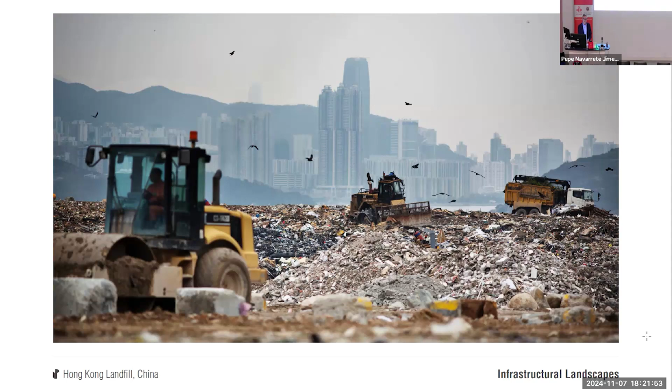It was inevitable, being here in Scotland, to start by quoting a fundamental character in this story that we're going to go through together today, Ian McHarg. Unfortunately, he was right. Humankind has always had the need to dominate the world, obviously in the wrong way. And one of its worst signs is the formation of immense landfills that accumulate millions of tons of waste uncontrolled. This will be the common thread of this lecture.

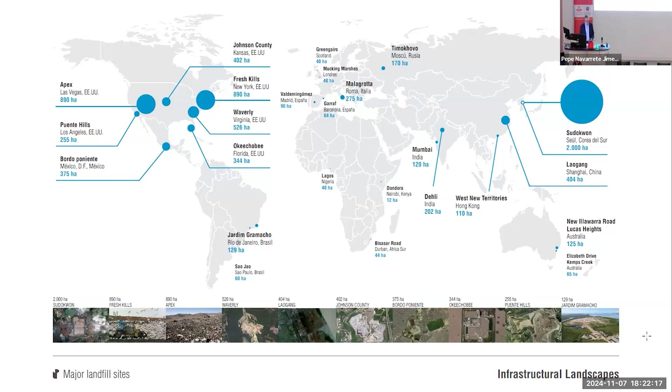As you can see, it is a problem that affects all of us everywhere, including here in Scotland. It is a global problem that affects us locally. Waste and its consequences are no longer invisible. Nothing that we understand by waste disappears from nature on its own. The Italian environmental historian Marco Armiero has defined it perfectly. We have entered the age of waste, the Wasteocene, as a specific alternative to the narrative of the Anthropocene. The metabolism of the city and its externalities are at the center of contemporary public debate.

Even more effective than reducing, recycling, reusing, or recovering is to avoid generating waste. So where does our waste go? Rather than to waste treatment facilities of any kind we can imagine, the rubbish goes into nature, just like that. All the images we have seen previously were natural places. This causes serious environmental damage, which, due to ignorance at first, has caused the problem to reach a colossal dimension that is difficult to reverse, like the entropy that the American artist Robert Smithson spoke of.

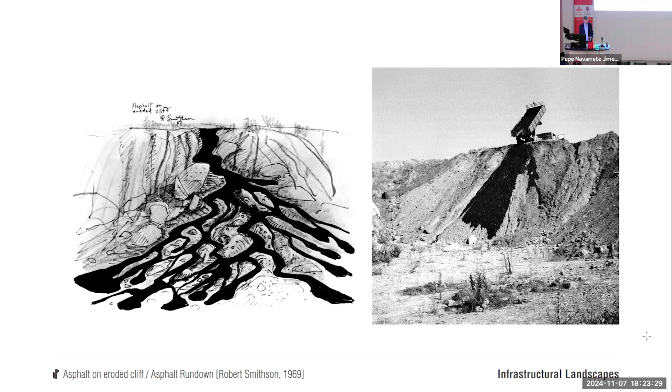Systems are becoming increasingly entropic, more chaotic, releasing more energy and transforming themselves. Human behavior, lack of environmental awareness, and insufficient waste collection and treatment infrastructures exacerbate the problem in all areas, regardless of density and use. The reality is that we don't know what to do with our waste. If we don't know what to do, why do we keep producing it? We think we know, but in fact, we are not able to assimilate the production.

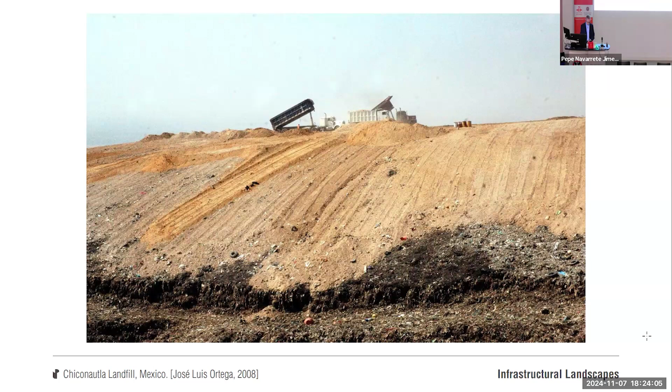Neither is nature. In this regard, 15 years ago, I wrote that the problem of municipal solid waste generated in our cities is not solved. It is simply displaced. This is still the case today. And if we are aware of it, then we should ask ourselves, why do we still produce waste? We depend more on education and awareness rather than on technology. Politics, will, education: if we are all concerned, what is our task in this project of eco-social transformation? Whether we want to or not, it is inevitable. What is our relationship to landscape?

We could say that until the 18th century, the notion of landscape was a garden designed in an enclosure. There are magnificent examples, especially the Arab gardens, such as those in La Alhambra, in Granada, Spain. The notion of landscape changed when the English gardeners in the 18th century decided to jump over the enclosure and understand that all of nature is a landscape. In a continuum, in these gardens, Uvedale Price, Payne Knight, Capability Brown, William Gilpin, we find the origin of the concept of continuous landscape that fuses the natural and the artificial, the picturesque.

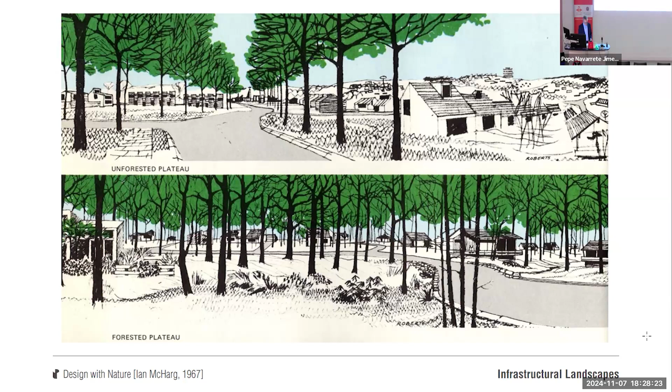We are interested in Ian McHarg's Design with Nature, firstly because of his vision based on new awareness and relationship between nature and the environment produced by human beings, and secondly, because of his approach to landscape based on a multidisciplinary condition, using an overlapping system to reveal the condition of a landscape, from beauty to utility, including vegetation, geography, hydrology, productivity, and energy. All of this is based on respect for the environment.

Design with nature is nothing more than giving continuity to what already exists in accordance with its characteristics or condition, so that the natural and the artificial can coexist simultaneously. Ecology is the basis of a new method which describes natural processes and transformation factors, a new hybrid between the natural and the artificial.

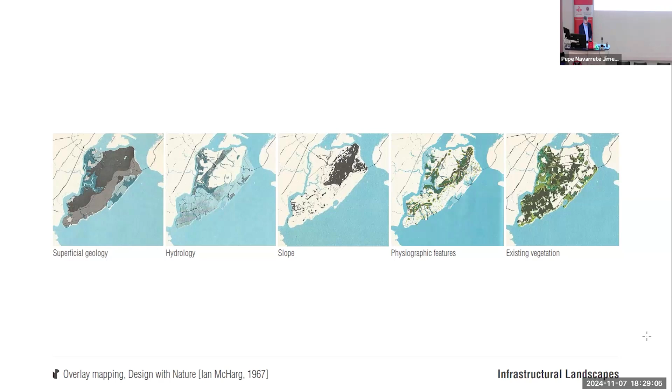Also, as I mentioned, in 1967, Robert Smithson published A Tour of the Monuments of Passaic, where he proposes a look at the destructive places of modern industry, condemned to be invisible, on the understanding that these places should acquire a visibility equivalent to the picturesque proposals about wild places, or what is the same, about nature. This action, moreover, takes place mainly on the ground level. Traces of human action on the territory, or topographies.

He reinterpreted Olmsted's work and promoted the construction of artificial topographies on wastelands as a basic operation of human beings in their relationship with the environment in which the passage of time was recorded. Smithson was interested in places where it was possible to ask new questions and pose new answers. He called them non-sites, defining a new conception of the world through two fundamental concepts, entropy and recycling, where natural processes are integrated in continuity with physical and energetic ones.

And this continuity arises from the manipulation of the ground through the construction of artificial topographies, while at the same time allowing the appearance of new surfaces for new, as yet unknown uses. Therefore, topography as a contemporary conscious fact in our relationship with nature is the second condition of the contemporary landscape that is interesting to us.

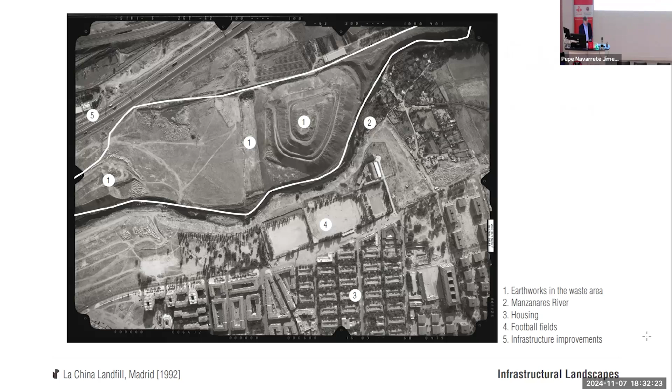We could affirm then that infrastructural systems, understood at the scale of the territory, are themselves generators of landscape. Today, these systems include the processes of recycling waste that in reality is not actually recycled, it's hidden. We need a critical look. A critical look should make us reflect on our relationship with waste and with the planet through the environment and nature. It is clear so far that we live in a system based on a fusion of the natural and the artificial.

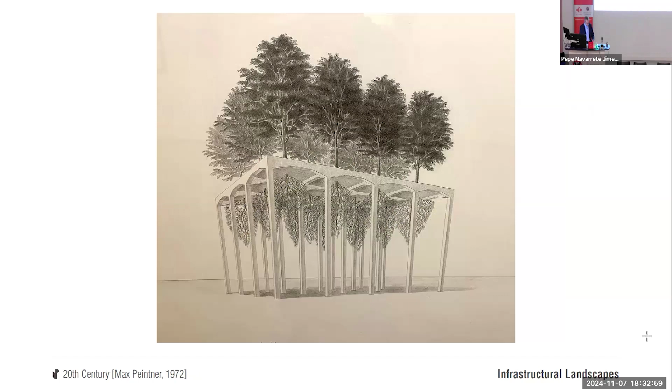We have gone from occupying the territory to exploiting it and annihilating it, to trying to hide this fact. The paradigm of ecology, which fuses the natural and the artificial, transforms our vision of the world at the beginning of the 21st century. In fact, it has been transforming it since the end of the 20th century. But we still only understand it in small, scattered fragments, awaiting a truly revolutionary process that will bring about a real change in our relationship with the planet. Apparently, we do not have the answer, although small changes in that direction are beginning to be identified.

So what can architects and landscape architects do when facing this phenomenon of waste? Research and dissemination of results will also help us. I have been doing it for the last 20 years. I wrote this in the conclusions of my doctoral thesis 10 years ago: waste should not be seen as a problem, but as an opportunity. This is our new task. For the time being, this is perhaps the best approach that we can be taking in our struggle to manage the growing mountains of waste.

Well, I was wrong. More can be done through the visibility of these projects, raising awareness to generate less waste and improve our relationship with the environment. We can help by projecting the change and making the invisible visible, using architecture and landscape architecture as a vehicle, as a tool. At the same time, repairing the damage caused to nature, but not returning it to its former state. This is not possible.

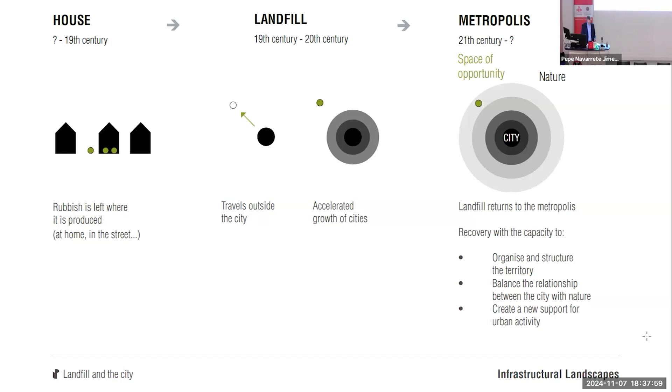So what can we architects do in this context? First, give visibility to the processes of recovery from the damage that has been caused in order to prevent it from happening again, if it's possible. And in this work of making visible, with the means and tools available, return the deteriorated place to a state as natural as possible.

During 22 years of activity, until its closure in 2000, the Valdemingómez landfill accumulated more than 21 million tons of waste, rising just over 40 meters above its original level. The exploitation of the landfill was planned in accordance with the techniques that had been used for years in Europe, especially in England. This system had 3 stages: shredding of the waste at the plant, transport to the unloading platform known as a landfill, and finally, spreading and compacting of said waste. The process resulted in layers of inert material about 20 centimeters thick every 2 days, which served to prevent rodents, bad odors, and dispersion of materials by the wind, as well as ensuring fire prevention.

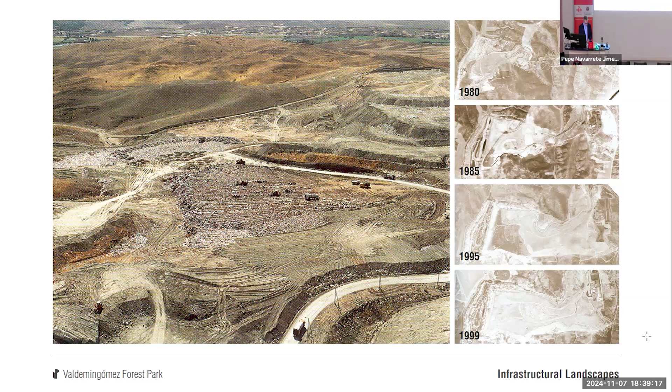The Valdemingómez landfill in Madrid can be identified as one of Robert Smithson's monumental vacancies that he describes in the aforementioned A Tour of the Monuments of Passaic.

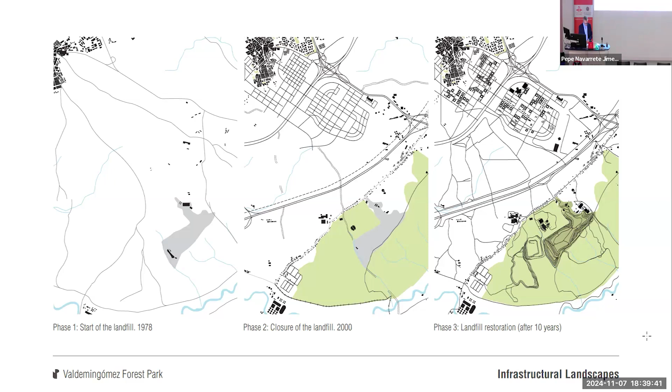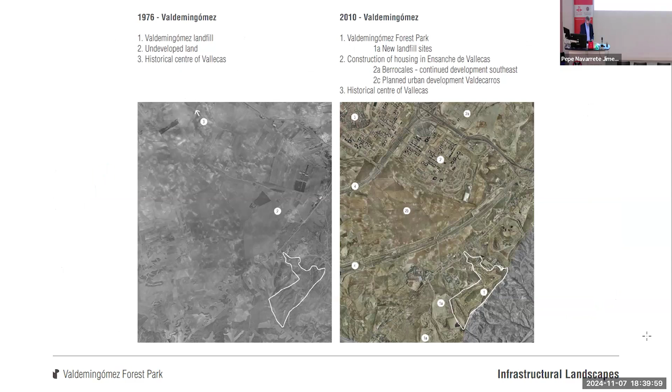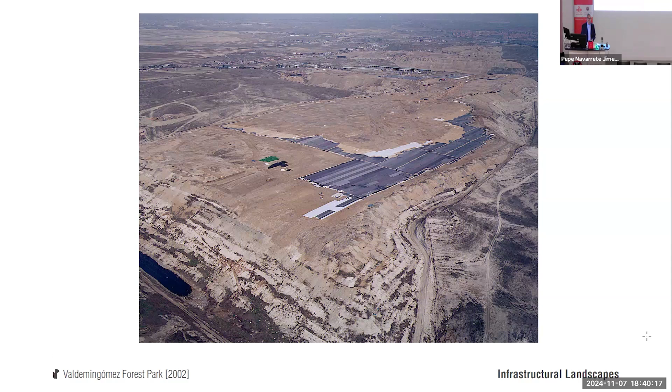They are understood to be sites of new opportunities with a dense and flexible natural and technological topography that can support the new expression of individuals' life. The recovery and transformation of the landfill represents a model of the continuity that woodlands can offer for the surrounding landscape, using indigenous species that blended with the nearby Southeast Regional Park to convert the area into a public park. Recovering these spaces yields a new continuous landscape system with new natural topographies arising from artificial processes, incorporating energy systems along with other infrastructure elements to allow the landscape's transformation and growth over time.

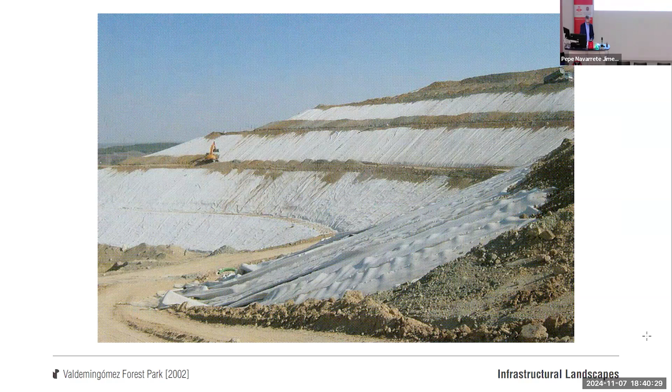The process carried out in Valdemingómez thereby recalls the concepts of entropy and recycling developed by Smithson. First comes deterioration, then recycling, introducing the time factor as an enabler of change. It was very important to cover the landfill with topsoil for the initial pioneer plant colony, which would prepare the means for sustaining more advanced species by contributing organic matter to develop the soil. So from an inert medium, the landfill is transformed through the development of a biologically productive soil into a complete self-sustaining ecosystem.

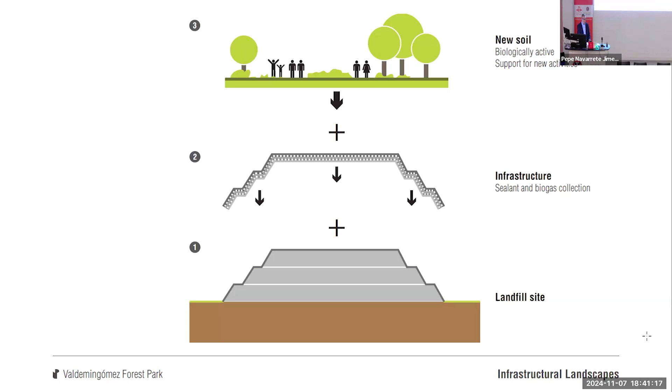All possible plant formations found in the surroundings were planted, following the recommendations set out in the Southeast Regional Park Master Plan. A series of public uses emanated from the recovery and reforestation project, and the new space will soon incorporate trails, paths, a cycle path connected to the rest of the city's network, woodlands, rest areas, wetlands, observatories of the new ecosystems developed there, and viewpoints over the city. In the spring of 2003, the landfill, transformed into a large forest park of more than 110 hectares, began its new life as an open space for leisure and enjoyment.

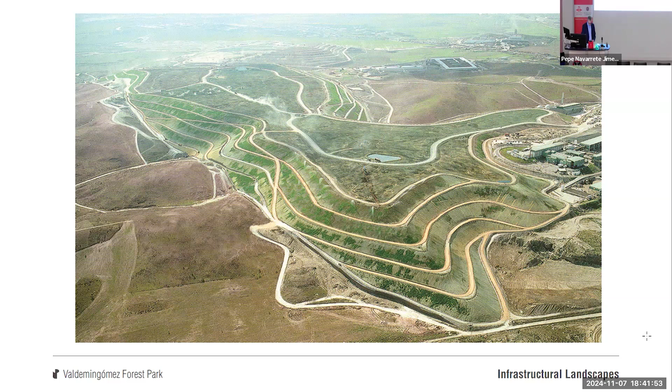One of the keys to these projects, introducing the time factor as one of the essential variables, is to consider change for its own sake, without predicting what that change will be. So, time is a key factor in the complete recovery and transformation of these sites. Today, the park has yet to open to the public so they can make free and continuous use of that space, since the extraction of the biogas stored in the landfill produces constant settling of the soil. According to current legislation, spaces destined for public use must be redefined safely following the 30 years of environmental monitoring necessary after their closure.

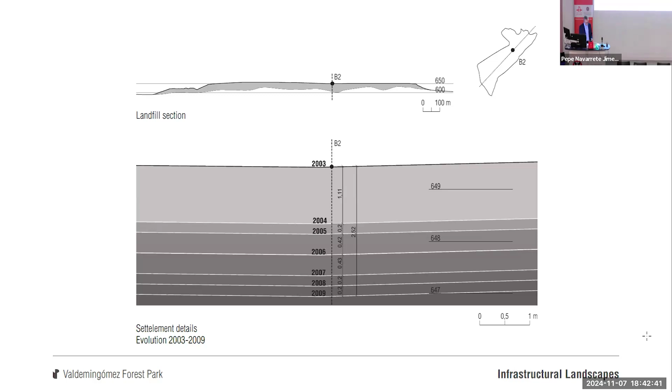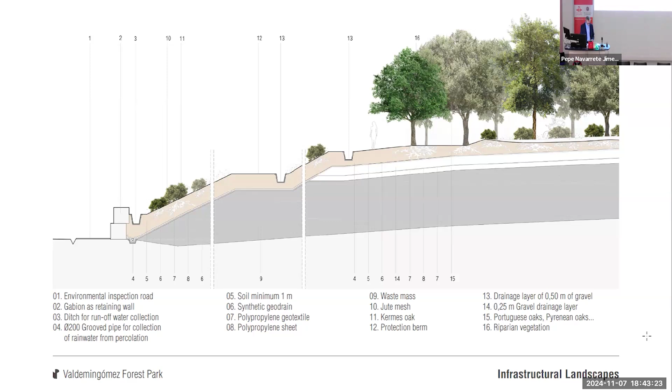The landscape, vegetation and water objectives are not usually very visible at the beginning of these recovery processes, as they are long-term proposals and depend on time and change in natural processes. The aim is to set in motion a naturalization process that develops over time without the hand of man being perceived and necessary. The landscape project is known when it begins, but not when it ends. It is necessary to know with whom we are working: with nature. And nature does not have specific objectives, as architecture can have. This type of project responds to common and recognizable characteristics such as topography, geometry, water, and vegetation. They are also an opportunity to become new nature reserves, which are so important today.

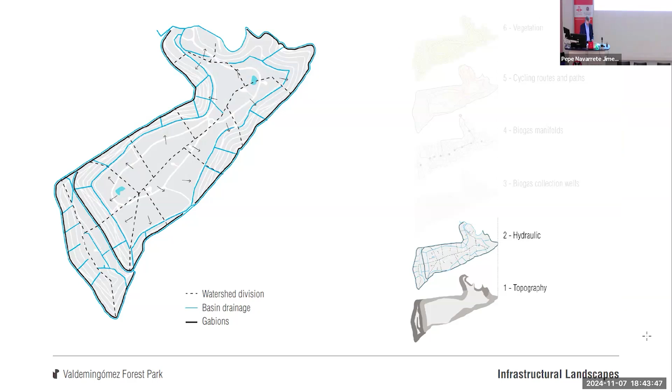The use of water is not merely an aesthetic artifice, but a response to new environmental problems, generating new wetland ecosystems, taking advantage of the surface water collection network and drainage of the park, whose surface, the soil, has seen its topography modified in the construction of the new landscape. One of the main objectives was to return the area to as natural a state as possible. The reality of an urban waste landfill full of organic matter, which makes it different from other landfills, requires acting with certain precautions that to some extent condition its development over time, although it does allow an important use of the accumulated biogas as energy to convert it into electricity, while at the same time reducing the emission of CO2 into the atmosphere.

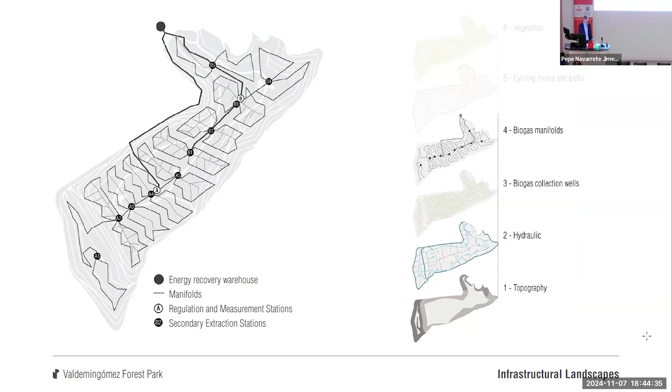The strategies developed in Valdemingómez bring it closer to the new models of metropolitan open spaces, making visible what was hidden, linking the metropolis to the territory through a landscape recovered and converted today into a natural topography emanating from an artificial process. The Valdemingómez Landfill Forest Park proposes a new type of public space that will ensure that accumulated waste can be harnessed for energy and that the landscape has continuity with its immediate surroundings. The tree species planted have taken root and the wetlands have become home to small colonies that form part of the natural cycle of their environment.

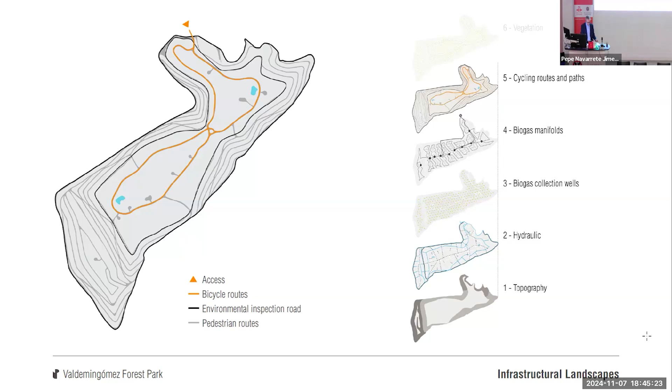The path, as the backbone system of these strategies, is fundamental as a connecting element, enabling continuity and accessibility. In the recovery of an urban waste landfill, the most important thing is to ensure that the plantations take root in the new soil. From this point, a distinction must be made between the upper and lower parts of a landfill, as well as between horizontal and sloping surfaces: trees on the horizontal surfaces marking paths, and the shrubs and plants on the slopes.

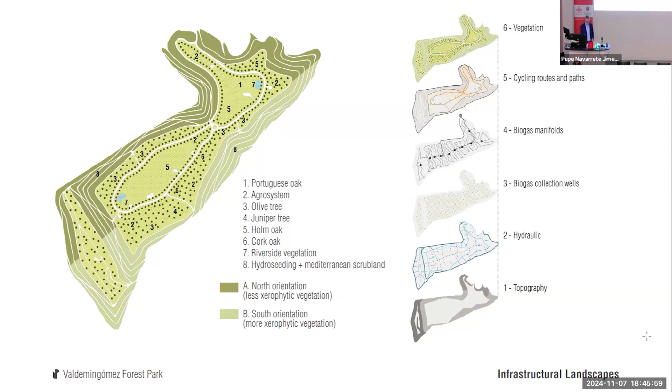Landfills are opportunities to achieve a balance between the city and nature when it comes to projecting the contemporary landscape. At the rubbish dump, it is possible to reinvent a place by redefining new unexpected uses in tune with the natural processes happening over time.

From a technical point of view, the plans to recover and transform the landscape of Valdemingómez landfill encompass 4 basic actions. First, the sealing of the entire surface to prevent methane gas emissions into the atmosphere as the result of the decomposing organic matter, and stop rainwater filtering through the waste and contaminating the subsoil.

Second, the installation of a degassing network to extract the biogas accumulated. Third, the construction of a power plant to transform this biogas into electricity. And finally, number 4, the transformation of the surface into a forest park.

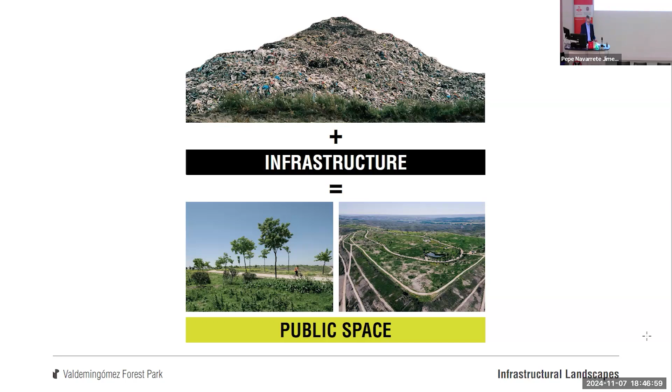The work carried out in Valdemingómez offers up a potential way for addressing the construction process in a place where waste has become part of the ground, creating natural topographies for the new metropolitan uses that arise from artificial processes such as waste dumping. This approach is inspired by the vision of Robert Smithson and shares with Land Art the use of nature as a support and material to enhance the value of a place. This contributes to creating landscapes that are intended to be sustainable, usable, and beautiful.

The specific values of the landscape we are interested in are constant and invariable: topography, hydraulics, vegetation, and pathways. From this point on, it is not so much the form that interests us as the relationship between process and form. We look for a flexible and adaptable support for spontaneous and unplanned activities. The project as an evolving, open, non-closed system. That's very important. The recovery and transformation of the Valdemingómez landfill is based on this principle.

The image fixed at the beginning will not be the image 30 years from then, nor will it be the image or the system necessary to open it to the public. At that time, both the landscape and the system will be redefined, but it will be possible thanks to its initial decision as an evolving system. Agricultural techniques have proven to be effective in allowing the initial development of these soils for better rooting, but also for this, and this is fundamental, a system capable of ordering a place.

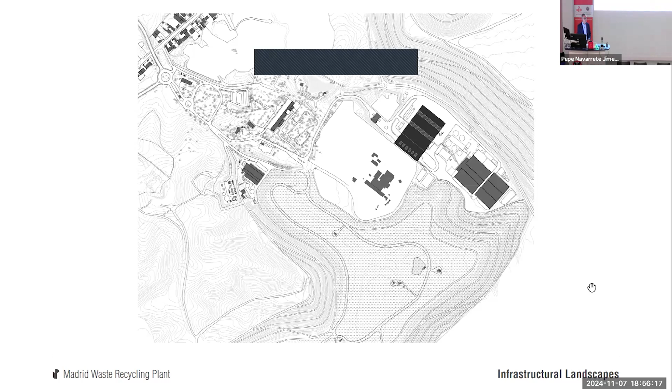So the new location for the waste recycling plant in Valdemingómez resolves, within the process of landscape restoration of the former landfill, two difficult situations that arise in the development of the forest park. On the one hand, its compromised location within the area to be recovered, as it interrupts its continuity, and on the other hand, the necessary road access to the plant. The current position, which you can see here right now: this is the forest park and this is a new landfill. So this is a very important situation for the building.

The current position of the plant, located between the forest park and the Environmental Technology Center, that building that I mentioned before, compromises to a large extent the transformation and recovery that is being carried out. So we decided to shift the new plant to an edge position, in a limit between landfills, considering it to be the ideal solution to make such a transformation process easier.

This operation will definitely sew the entire landscape recovery into a continuum, so that the future users of this new metropolitan public space will be able to enjoy a walk without interruptions or barriers caused by busy roads, as currently happens today. So the main decisions were then continuity again, and to seize the strength of the edge, the limit, shaped in this case as the slope of a landfill, the transition from the plateau to the perimeter.

In this way, the main building takes advantage of the existing topography and folds its roof like giant slopes with their berms, reproducing the silhouette of the landfill. In a gesture according to the site that helps to understand the scale of the intervention in the territory, while responding at the same time to the implementation and organization of the waste treatment process, which works in favor of gravity. The building, coated with transparent polycarbonate, absorbs the different tones and shades of the sky and the landscape.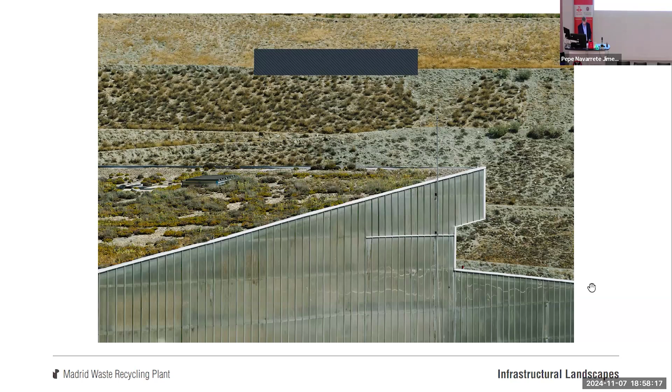It reflects light and color. It blurs and modifies the perception of its scale, appearing smaller than what it really is. From the outside, it looks opaque and mysterious, without revealing its content. On the inside, we discover a sequence of monumental spaces full of light, mechanized and highly industrialized, with silent conveyor belts endlessly displacing tons of waste. These strategies indeed help to reduce the scale of the building and to find the continuity desired.

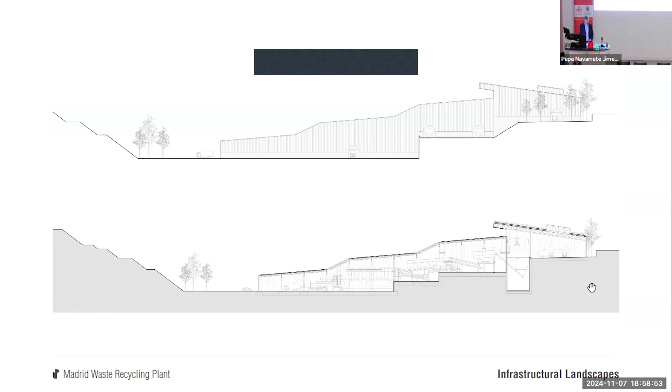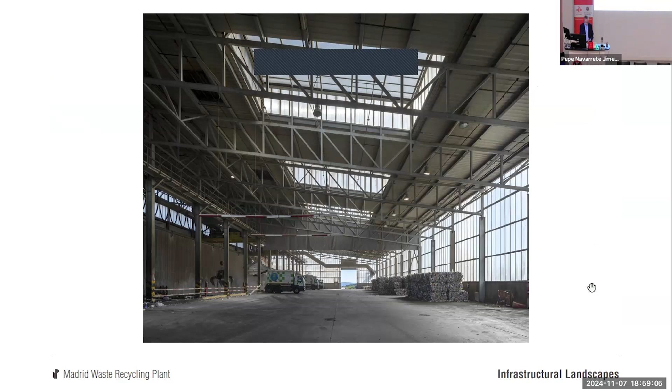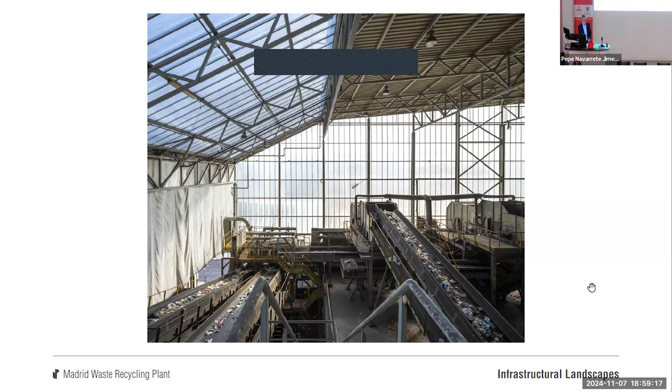This display of solutions also aims to dignify the work of the people in charge of managing our waste, to date generally forgotten and associated with the material found inside the plant. Walkways, stairs, and bridges for visitors allow them to observe and contemplate the management of our waste in order to raise awareness and sensitize. This is at present the best way ahead.

I want to talk now about construction details, because let me say at this point that I believe that the role of the architect is to build our environment, the human environment. So we need to move from ideas to construction details to make things come to reality.

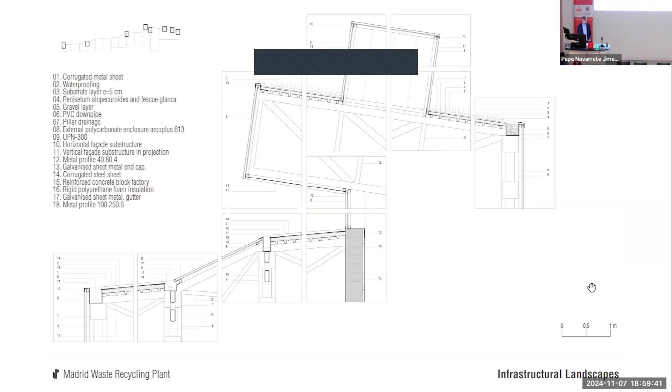From the forest park, only the landscaped roof covering the waste reception pits can be seen, slightly inclined in the opposite direction to the slope to become a transparent and connecting element with the landscape, using the same local species and textures that cover it, of low-cost maintenance. The metal finishing of the roof and some skylights made of the same polycarbonate used in the facades reveal the existence of an artificial interior space.

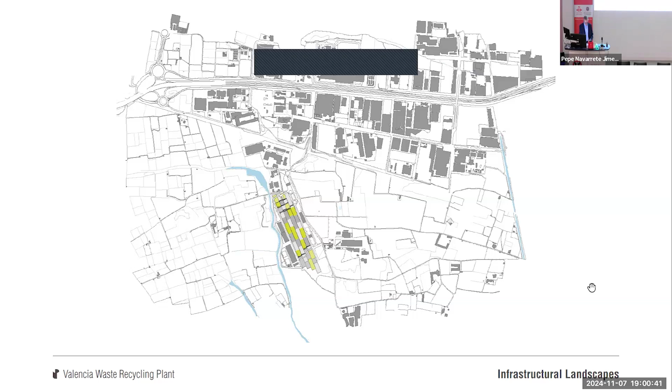And the last project I want to share with you is the Valencia waste recycling plant. This is very close to the disaster that happened to our country a few days ago, and I have many friends there. The recycling plant is located on the outskirts of Valencia city, in an area close to the airport, where the fields of orchards are spread out like a carpet of ochre and green, a typical image in this agricultural place of fertile land and mild Mediterranean climate.

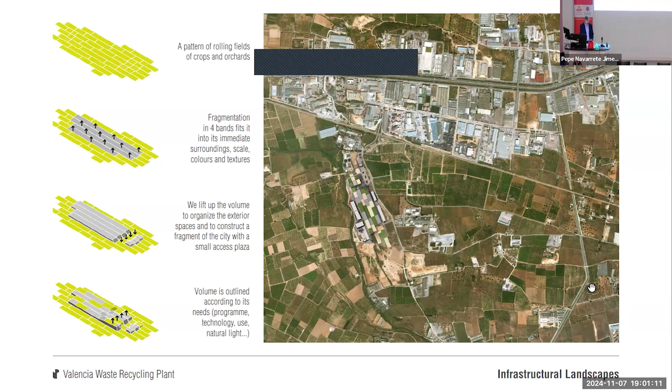The elements of the surroundings, such as topography, scale, agricultural patterns, colors, and textures, are used as a source of inspiration, responding at the same time and with accuracy to a complex functional program with strict constraints, with a simple idea and a unitary image, establishing an intense relationship between landscape and technology.

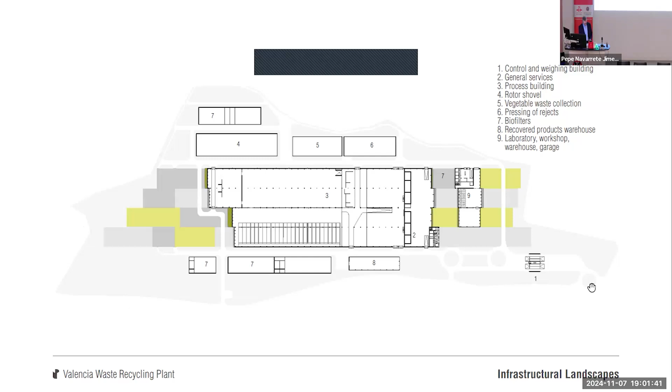In this context, we did not feel it was necessary to use either the form or the image to reveal the content of the building, inviting visitors to discover, like in Madrid, a monumental, mechanized and industrialized interior space full of waste. The implementation and organization of the waste treatment process, which works in favor of gravity, have been developed by making the best possible use of the topographical conditions of the site.

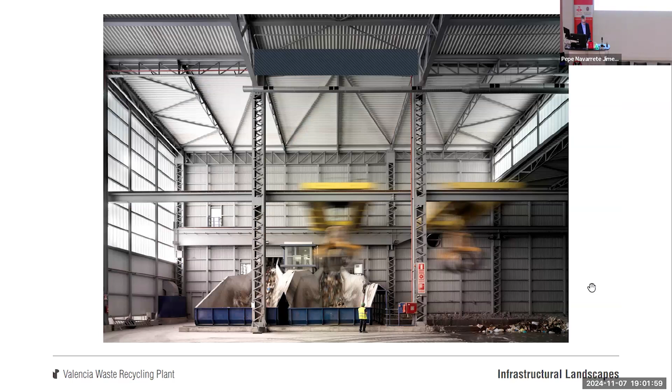The fragmentation of the main building into 4 longitudinal bands reflects the internal logic of the waste treatment process and the need to have natural light for all the internal work. These bands, extended along the ground with colored gravel and natural grass in continuity, again, with the facades and roofs of the main building, negotiate in scale with the landscape, linking the project with the ground and fitting it into its immediate surroundings. The roofs reproduce at the same time both the industrial process and the surrounding agricultural landscapes.

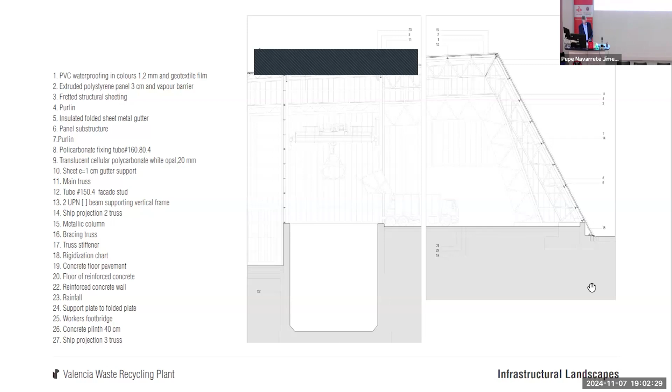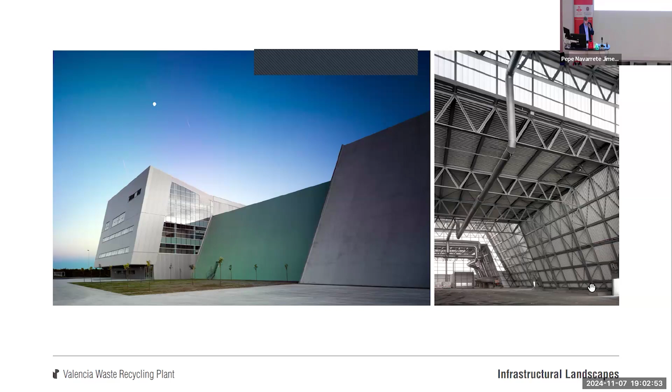The Valencia waste recycling plant is an infrastructural nature that is generated through geometry as an architectural tool. This approach attempts to insert an artificial element into an anthropized natural environment profoundly transformed by human action, where scale becomes a fundamental factor. This project, conceived as a public facility, also incorporates a visitor center and an education area to make the energy possibilities of the plant visible.

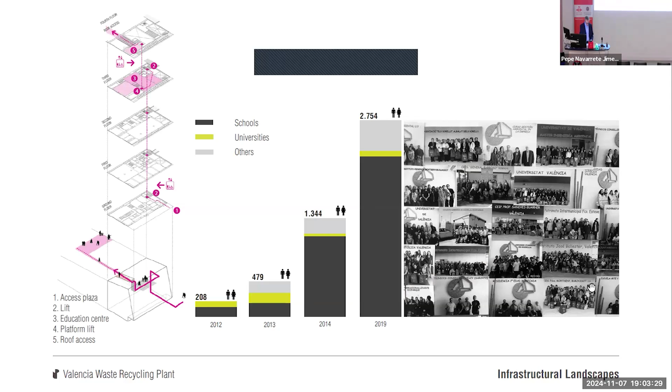And here again, to raise awareness among citizens, who also have a key role. We have a key role to play in the management of what we choose to throw away. As a kind of an observatory, it is a place to study, understand, and contemplate contemporary society and its relationship with the environment. The tour for visitors has been designed inside of the main building, which together with the educational and exhibition areas interrelates waste, city, energy, and landscape.

From here, the work with light and space aims to dignify a place for people to work, traditionally dark and forgotten in the architectural imaginary, as I mentioned before. Reflections and colors play a fundamental role in this project when addressing the question of size. Thus, the roofs merge into the landscape following the use of its colors, while the facades of the building, through reflections of the materials used, are blurred.

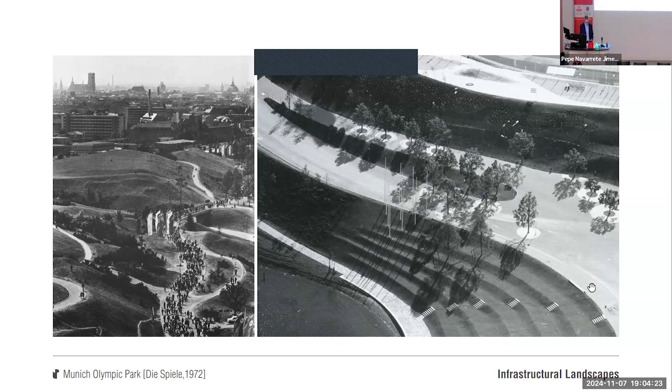Okay, we're approaching the end. So let's rethink the infrastructural landscapes. We do not confront nature anymore. We work with nature, manipulating its forms through topography to build sustainable, beautiful, and useful landscapes. The 3 projects presented today share a characteristic: seeking continuity with the existing landscape through the manipulation of the ground, the topography. In the 3 cases, in different ways, but always highlighting its artificial condition without renouncing it.

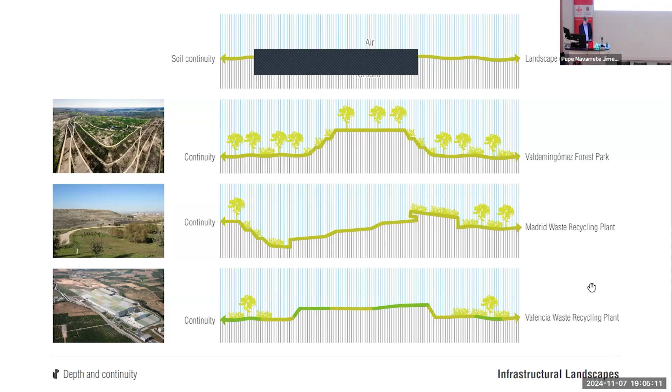It is not about wrapping a box. Most waste facilities are just shiny boxes with a more or less sophisticated design. Continuity is the key question. Learn from those first picturesque gardeners and landscape architects. Continuity, but without resigning the artificial condition. The infrastructural landscape takes scale into account. The relationships of the architecture of the territory operate on another level, on another scale. The macro versus the micro.

Today, aware of our relationship with the environment, I am concerned about having to carry out these projects because the damage does not disappear. We just hide it. As a society, we urgently need to reflect on this challenge. Fortunately, another way of looking teaches us how to improve the Earth's surface through human intervention. Human action can improve a landscape, as is the case of Valdemingómez or others.

First damaged, then recovered. Probably Robert Smithson's greatest contribution was to turn unnatural works into a record of nature and the passage of time. One of his main ambitions was to create works that were not natural, but which could reveal nature and time, aspects that he rescued by rereading Olmsted's work. As a result, he promoted the construction of artificial topographies on wastelands as a basic operation of human beings in their relationship with the environment, while exploring his non-sites in parallel.

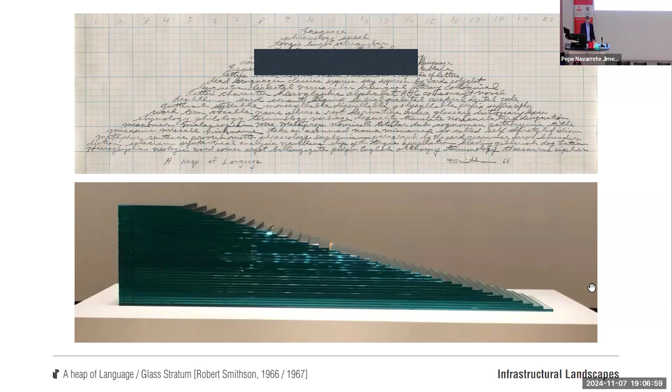In this sense, the landscape that we are interested in is characterized, as already mentioned, on the basis of three conditions: topographical, useful, and productive, in terms of public use and energy, thus overcoming the aesthetic condition of the picturesque ideal, which is a further step in its contemporary construction as systems of infrastructures capable of organizing urban planning.

The landscape is made up of strata, successive layers that slowly accumulate as a record of time, at the same time as it is affected by different changes that happen due to the cycles of nature. The redescription of a site involves, first and foremost, providing the intervention of a topography, such as the one provided by a waste landfill. It is essential to understand the relationship between nature and human intervention in it, and the natural and industrial landscape, and ultimately bringing all these aspects together.

The energy that transforms and unifies them, entropy, as a metaphysical concept to understand the order and disorder of the world. According to Smithson, we should embrace change. He updates the picturesque concept with that of entropy. This effort for continuity is something we architects and landscape architects can achieve through our work, establishing new mechanisms of relationship with the territory. It is necessary to see and understand the layers of waste accumulated in the landfills of the peripheries of contemporary cities as a phase in time, but not the only one, nor the last.